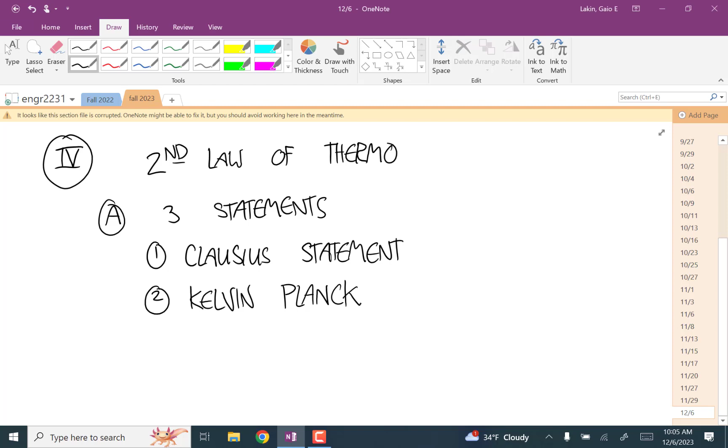And then the third one, the one that's most important for us, is the entropy statement. Remember that when we talked about the Kelvin-Planck statement, that was when we talked for the first time about efficiencies of different power cycles and ideal efficiencies that are based just on the temperatures of the boiler and the condenser.

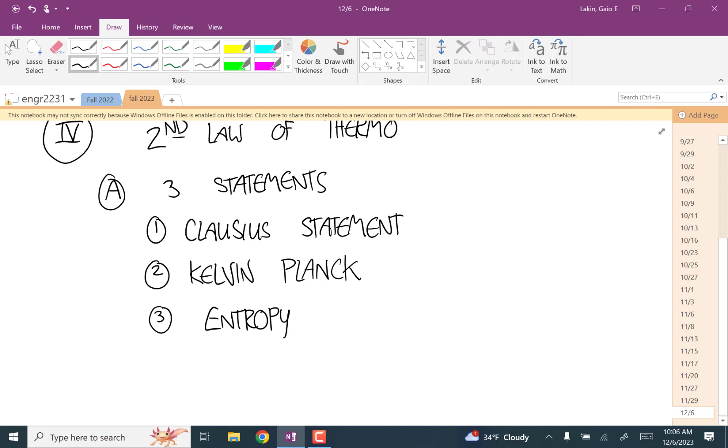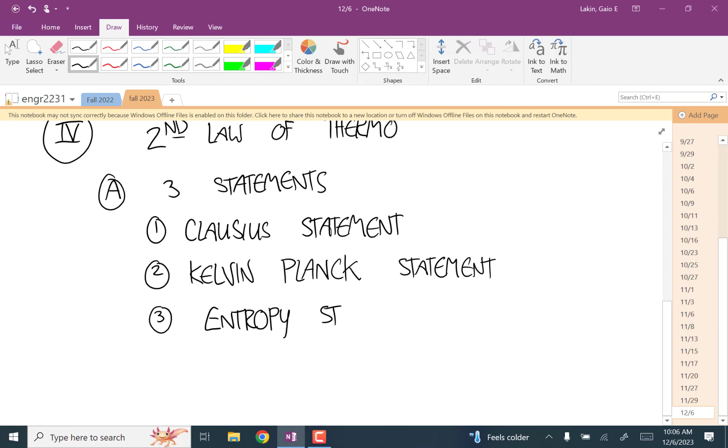And then after we talked about those, the first big result that came up was the Clausius inequality. And this was the first kind of hint at how much subtlety there is to this stuff. It's hard to keep all this straight, I know.

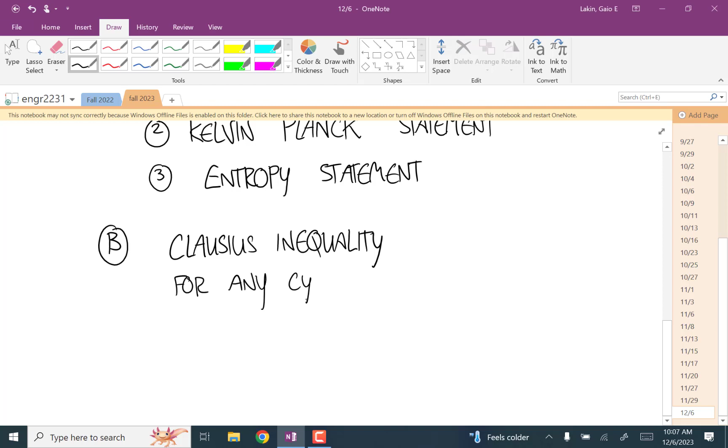But the Clausius inequality said, for any cycle, the integral of delta Q over T around the whole boundary...

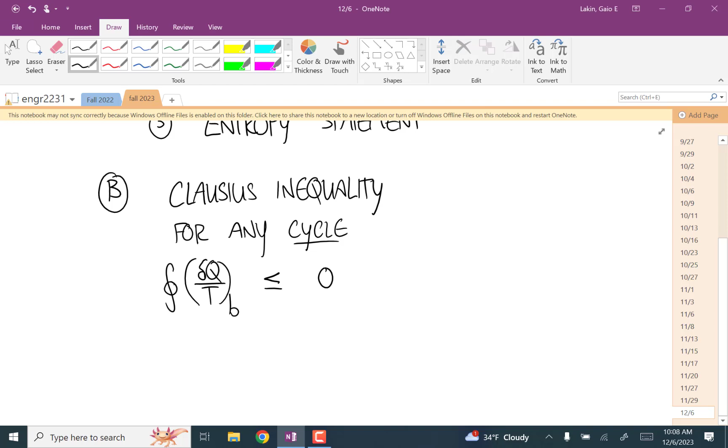You had an inequality, but I just bring it up because it's hard for me to keep this stuff straight too. But making sense out of this makes the stuff that comes later clear, so it's worth taking the time to try to straighten this out in your head, I think.

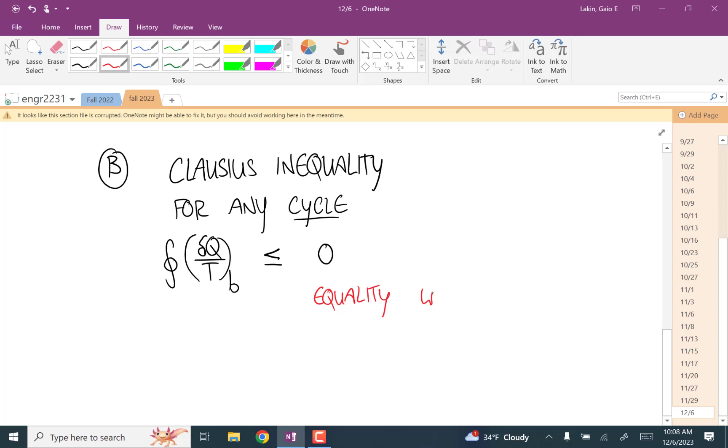And then, what would it mean if this was not an inequality? It was an equality? When would it be equal to 0? It's always reversible. Yeah, internally reversible, yep. Right idea.

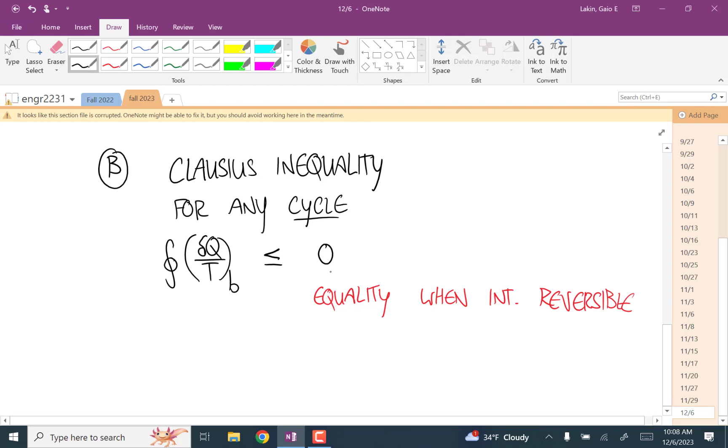Okay, and the thing to remember about this is that this is for an actual process, okay? I guess what I wrote in red makes that clear. We're not talking about a perfect thing, we're talking about actual processes. If it is a perfect thing, then it's equal to 0.

Well, that equality kind of hints at the fact that entropy is going to be a property, because if you have a cycle, then any property ends up back where it started again. So what this says is, if you start at some point, cycle all the way back to it, this thing that we're going to call entropy later is going to have no change.

Wait, didn't it say greater than or equal to 0? I swear I've seen it the other way around. The greater than or equal to 0 is if you add up all the change in entropy. Oh, I see, yeah, that's the kind of stuff that's so confusing about this. But if you take all the changes in entropy for an isolated system, you have to have greater than or equal to 0 entropy. But this is the opposite. And so what this gives us, we're going to get to it in a second.

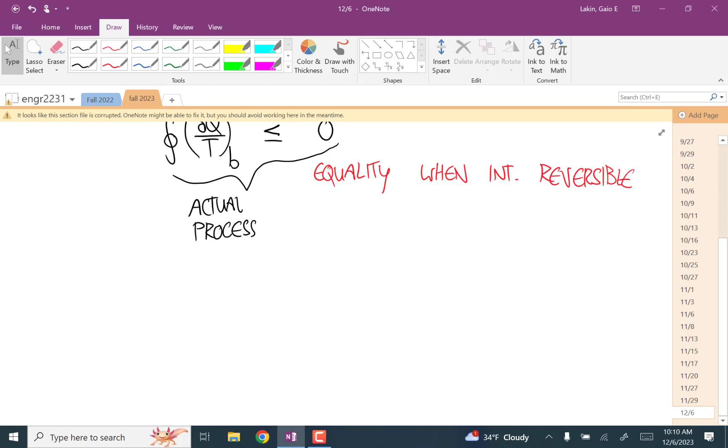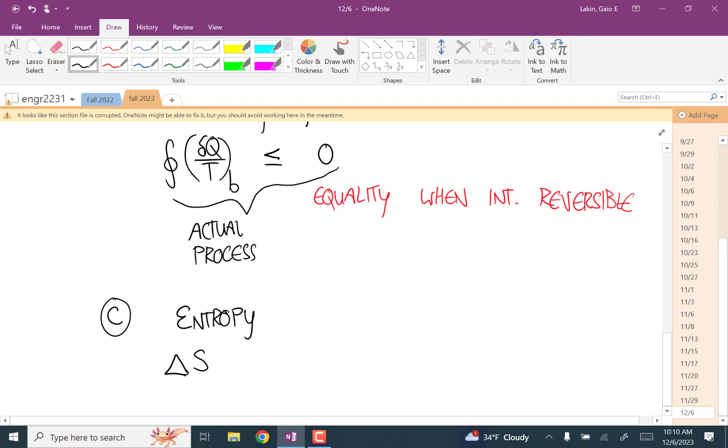Okay, so C. The definition of entropy comes from the fact that the change in entropy is equal to the integral of that same sort of funny ratio for an internally reversible system.

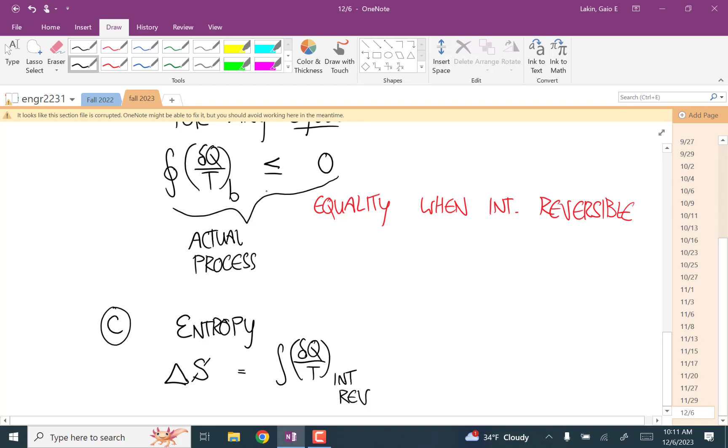Well, what would the change in entropy be for a cycle? That's what I was just saying, since it's a property, a full cycle brings you back to the same state you were at before, so there'd be no change in entropy for a cycle. On the other hand, for an actual cycle, if you're doing this calculation, you're going to get something less than 0. Okay, so now combine those two things.

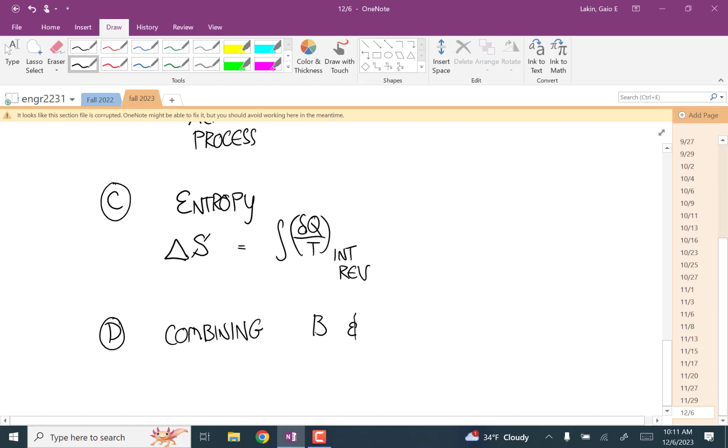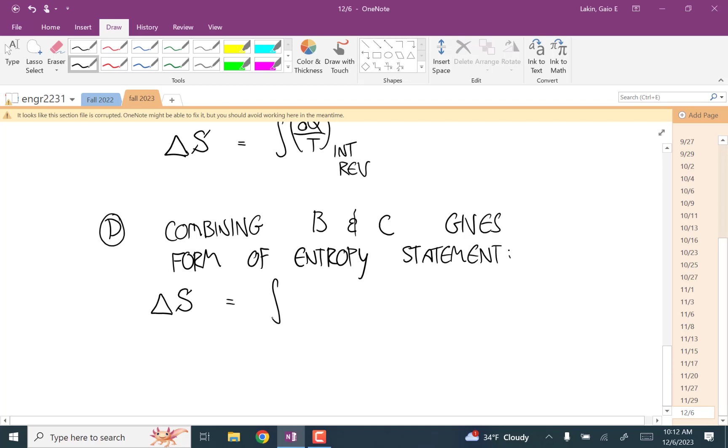Yes, sigma, but yes, exactly. Combining B and C gives this form of the entropy statement, this form that was really useful to us. And that says that the change in entropy is equal to the integral of dq over t around the boundary plus some sigma. And this has to be positive or 0.

And this is for the actual process. Well, if this wasn't for an actual process, if this was for an internally reversible process, then you have the definition of the change in entropy. So obviously those two sides would cancel each other and sigma would be equal to 0.

Okay? So online, sometimes people define entropy as like the measure of disorder of the system. Would that be accurate if there isn't any heat transfer involved at all in any kind of activity?

Remember, we talked about isentropic stuff where the entropy doesn't change, and that does require that there's no heat transfer. I mean, if there's no thermal activity at all, then you're at absolute 0 temperature, and then you're at 0 entropy.

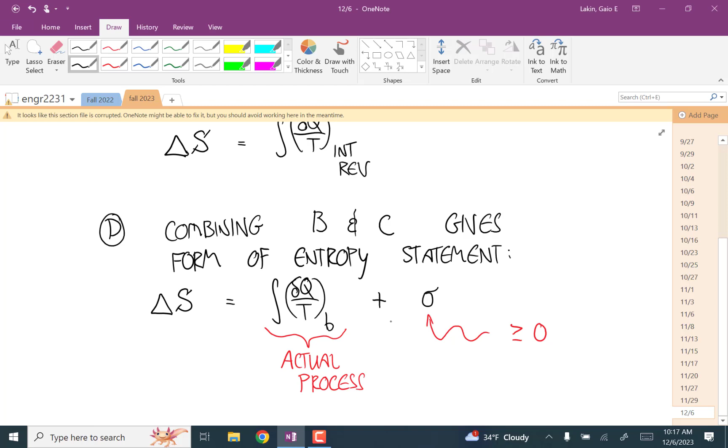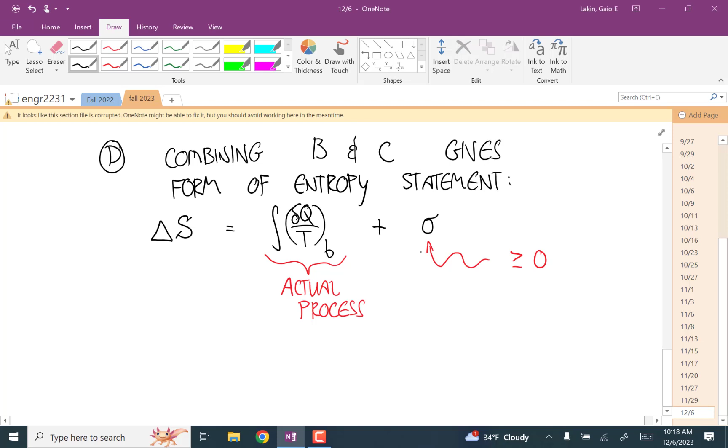So this thing is a statement of the second law of thermodynamics, one that's useful. It's useful because if you can figure out what that produced entropy is, it can tell you something about your efficiency. You want that to be small if you're building something that's efficient.

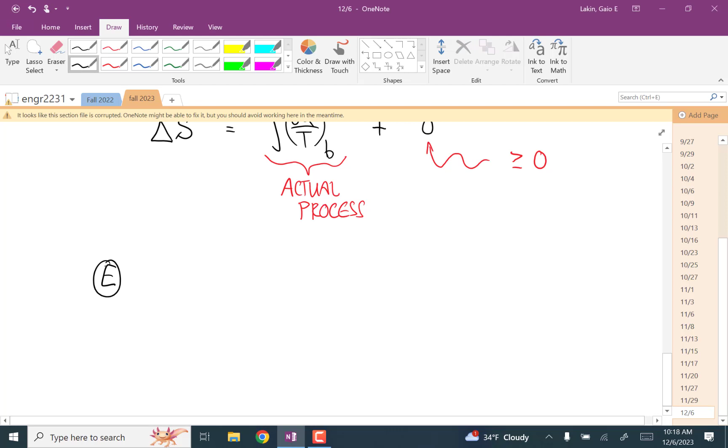And we'll get back to other forms of this sort of thing. Next was the TDS equations. These are very useful for calculations. We always dealt with them in pretty simplified cases, but a lot of the values in tables come from using the TDS equations. The key thing about this is that they always hold, so remember they're always available.

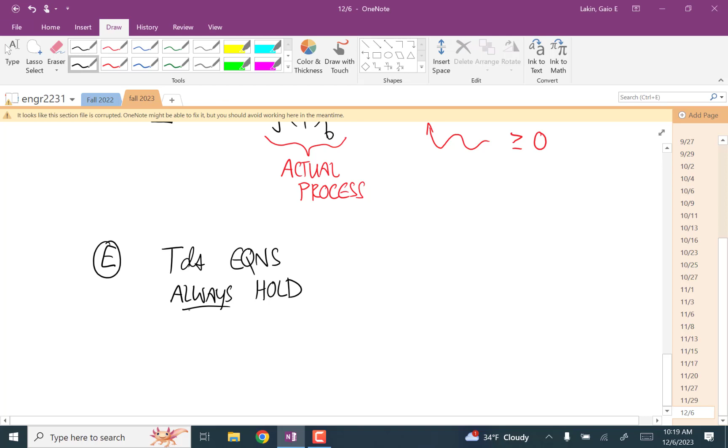And there are two of them. TDS is equal to dU plus PdV. And TDS is equal to dH minus VdP.

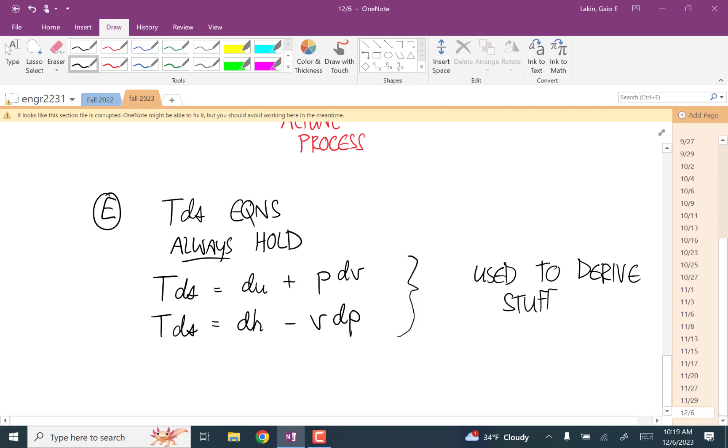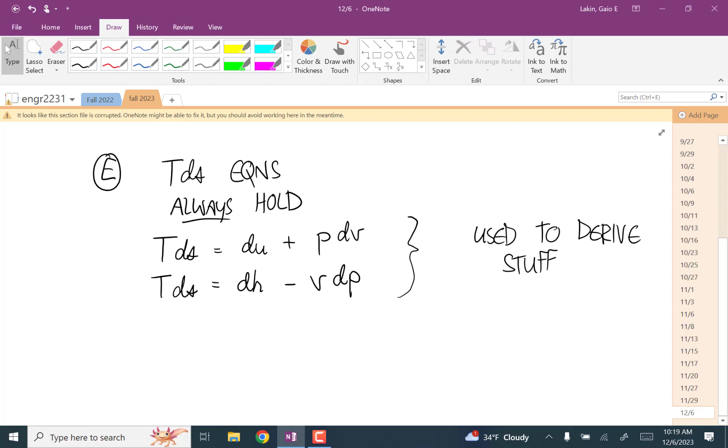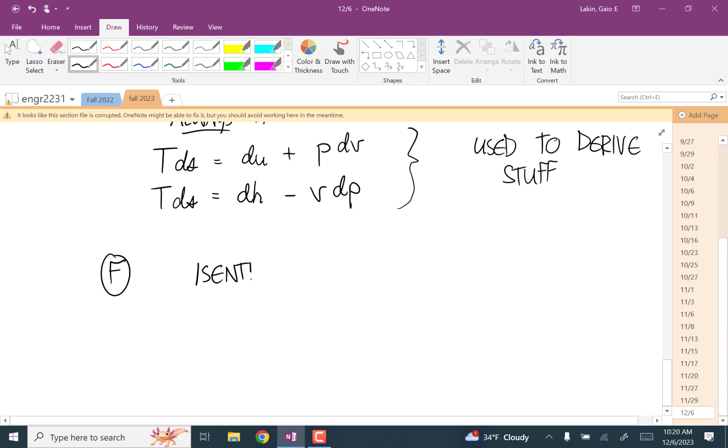And for us, we derived a lot of useful things from these. One of the things we derived, part F, was expressions for the change in entropy for incompressible materials and ideal gases. And from our expression for the change in entropy for ideal gases, we came up with this idea of isentropic processes for ideal gases. So this thing I'm about to write down comes from those TDS equations. This is isentropic processes for ideal gases.

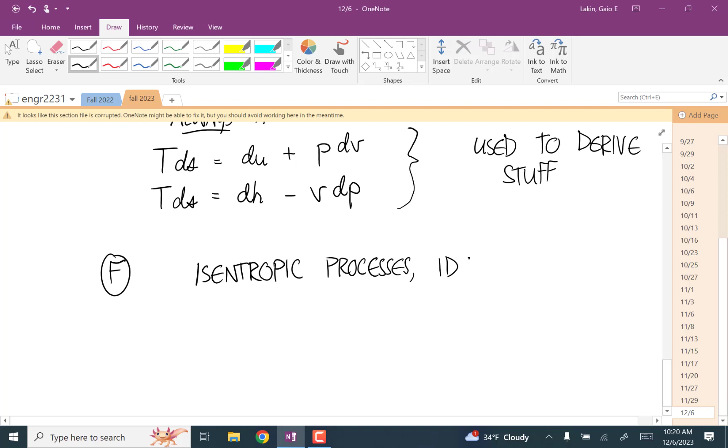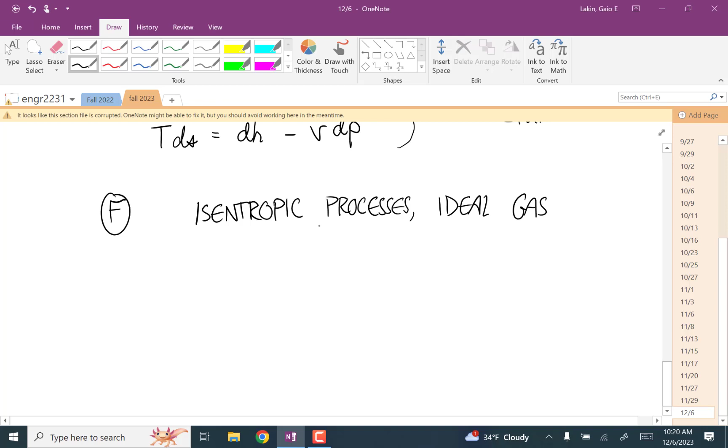What it requires for an isentropic process is that there's no heat transfer, and that the process is internally reversible. There's no irreversibilities inside the system.

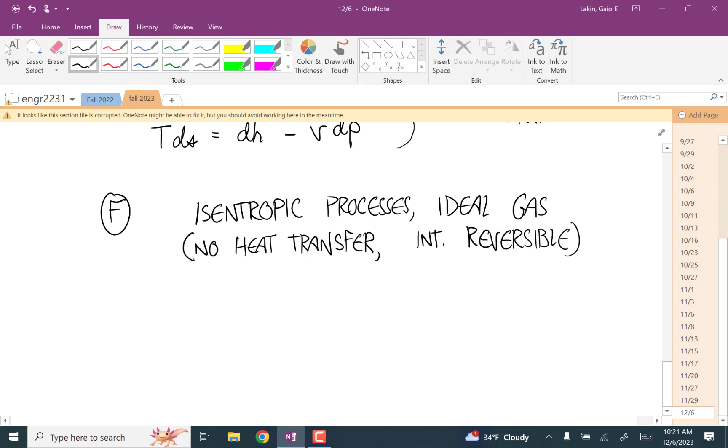And we saw this two different ways. The first way, the easiest one to use if you can, is if there's not too huge of changes in temperature. You get 0 equals Cp times the natural log of T2 over T1, minus R times the natural log of P2 over P1. So you can use knowledge of two pressures to get a beginning or ending temperature, or knowledge of two temperatures to get a beginning or ending pressure.

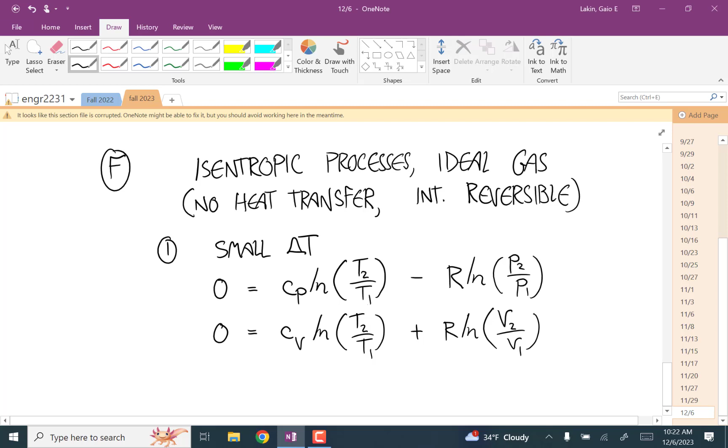And then there's another form that just comes from the other TDS equation: 0 equals Cv times the natural log of T2 over T1, plus R times the natural log of V2 over V1. If the changes in temperature are too big for this to be accurate, you can also use values in an ideal gas table.

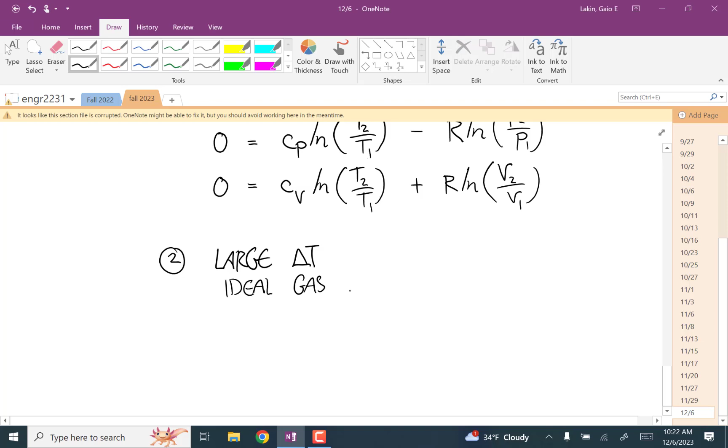So P2 over P1 is equal to P sub R at temperature T2 divided by P sub R at temperature T1. Those PRs are values you can just look up in the table.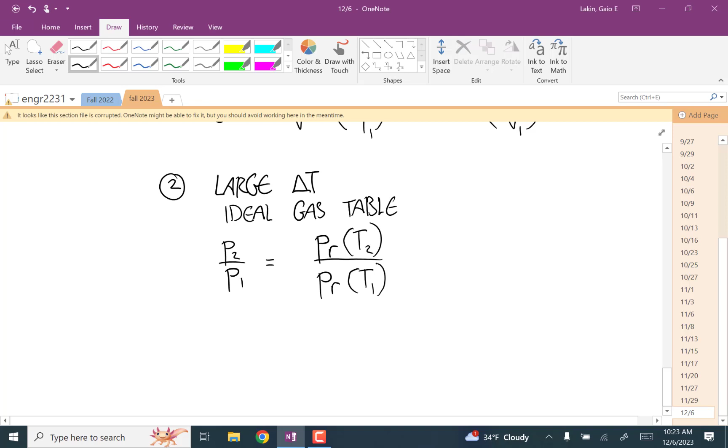And you can also come up with a ratio of the volumes with a similar idea. V2 over V1 is equal to VR of T2 over VR of T1. The PRs and VRs are just things you can look up in the ideal gas table.

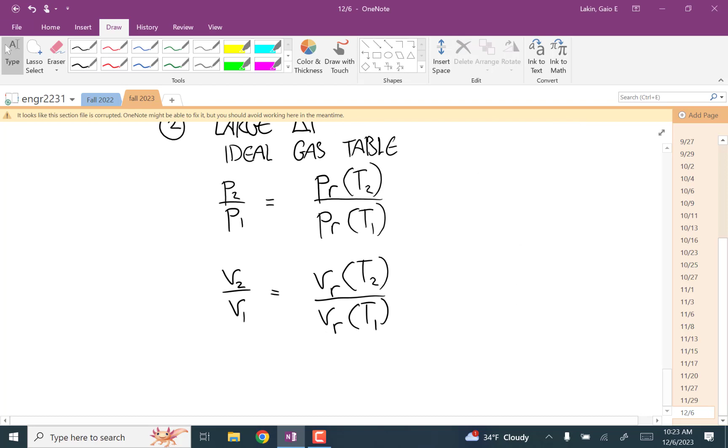And then the last thing that we talked about for the second law was, this is the second law for control volumes. And that said ds dt for the control volume is equal to the sum of all the Q dots over temperature around the boundary.

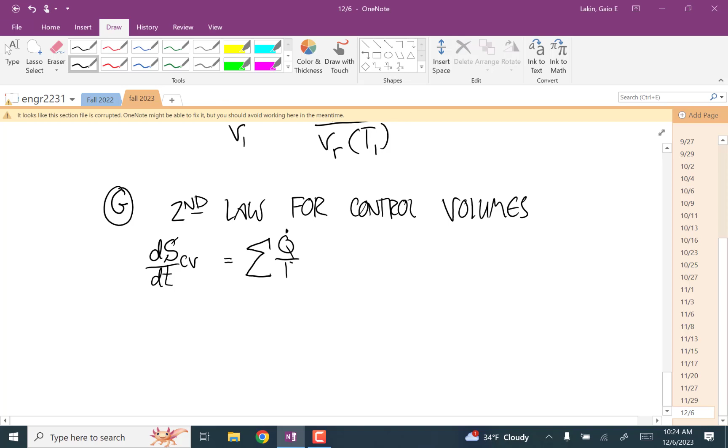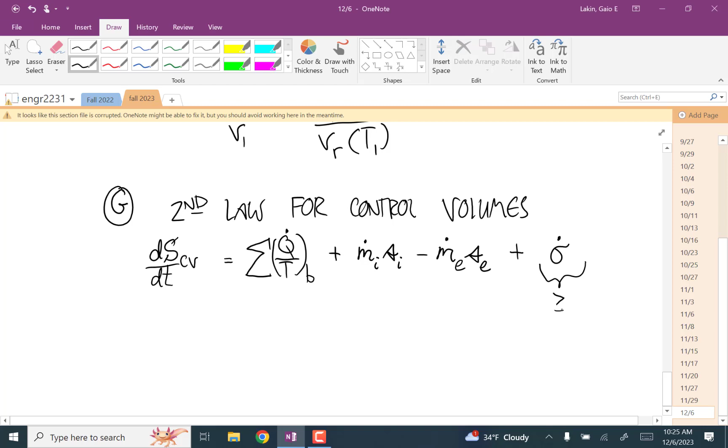Everything here is a rate. Plus m dot at the inlet times specific entropy at the inlet, minus m dot at the exit times specific entropy at the exit, plus sigma dot, and that sigma dot has to be greater than or equal to 0, and that's the rate of entropy produced.

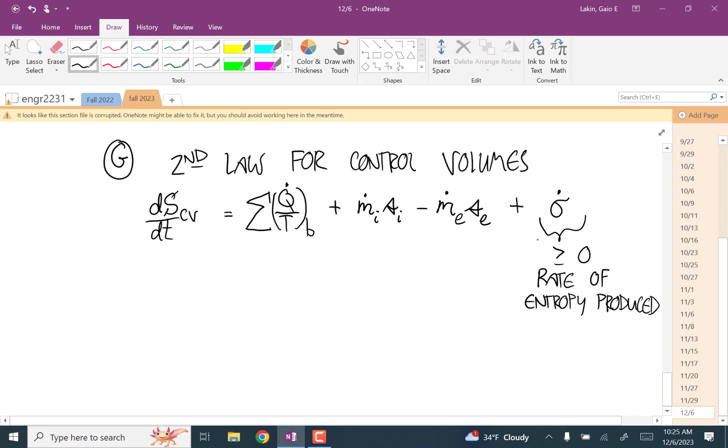And that value for the rate of entropy produced is useful the same way as our entropy produced was in the closed form, this sigma here, for just helping you find where inefficiencies are. If you have a very inefficient system, that value is going to be large, but it always has to be positive.

Can you remember any problems? We did 1 or 2 problems using this. Do you remember what kind of stuff you can do with this?

I remember one of the things that we did with it was we used the control volume first law to figure out something about a device that I said was either a nozzle or a diffuser. And we calculated using the first law what the values are, say the output speed or something like that, the exit speed. And then we ran it through this to figure out, okay, which one is it, a nozzle or a diffuser?

Remember that the second law is always something you can use, it's the only tool we have to figure out the direction in time that a process is moving. So what we did then is we assumed it was a diffuser, say, ran it through this. If you get a positive value of sigma dot, then okay, it's a diffuser. If you get a negative value of sigma dot, then no, it has to be a nozzle because it can't go in that direction in time.

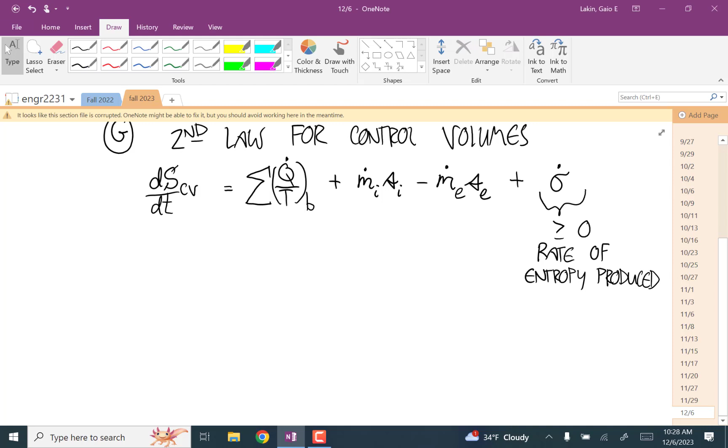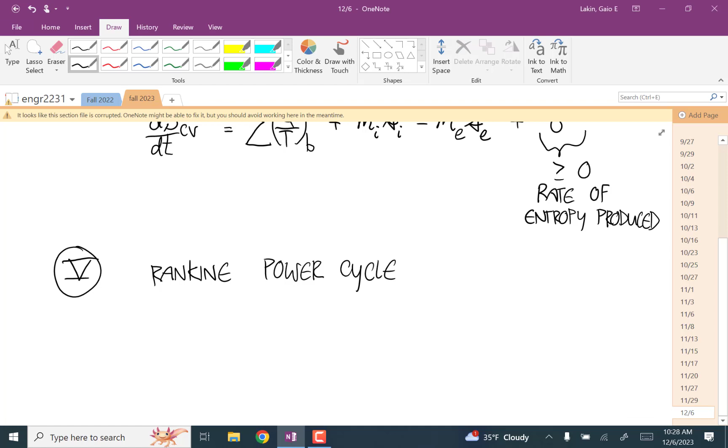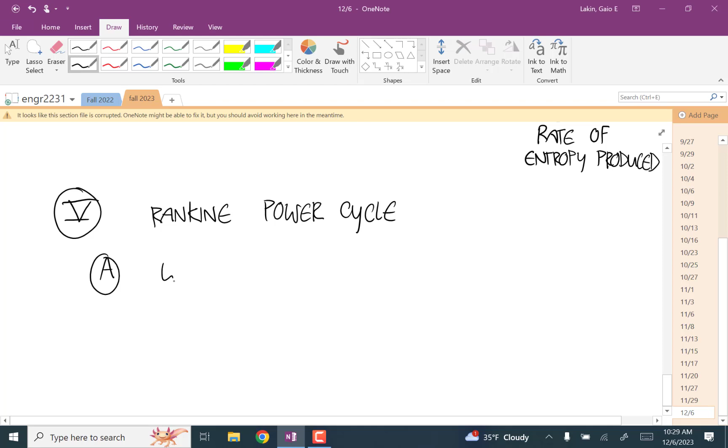Okay, and then the last thing we talked about was Rankine power cycles. So first I'm going to talk about without reheating. So this includes the case with superheating and the case without superheating. Both of them work like this.

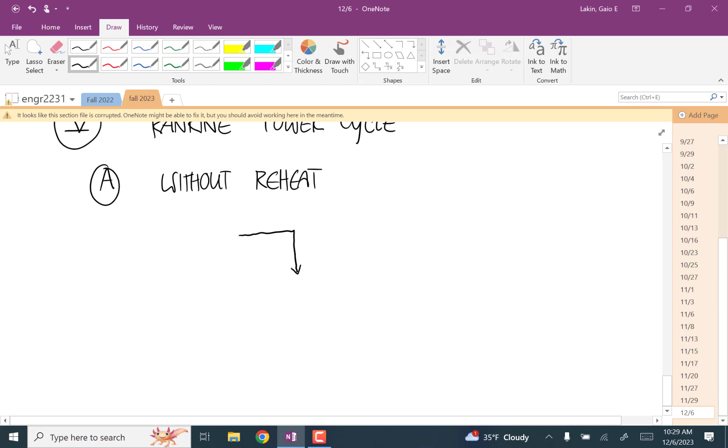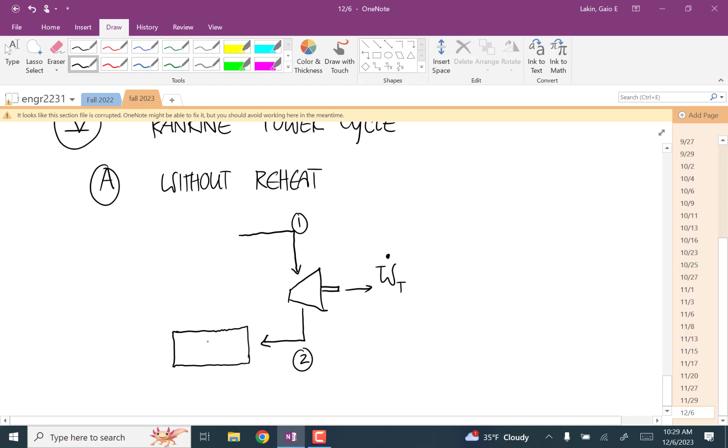You start here at state 1, go through a turbine to extract power, and that power is W dot coming out of the turbine. Then you get to state 2 and go through a condenser. And at the condenser, heat at a rate of QC dot leaves the system.

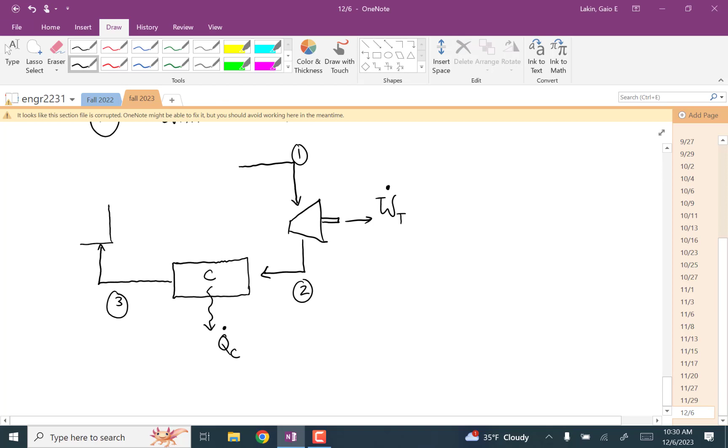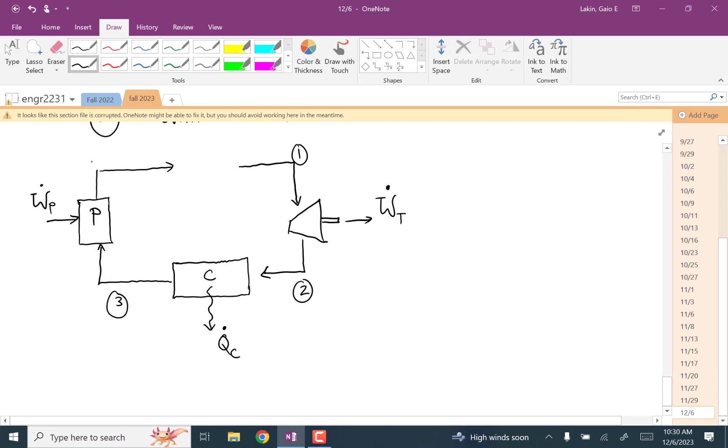Then you get to state 3, and the working fluid goes into a pump. And at the pump, work is done on the system, WP dot. And then coming out of the pump, you're at state 4, and you get to the boiler or the steam generator. And at the boiler, heat comes into the system at a rate of QB dot.

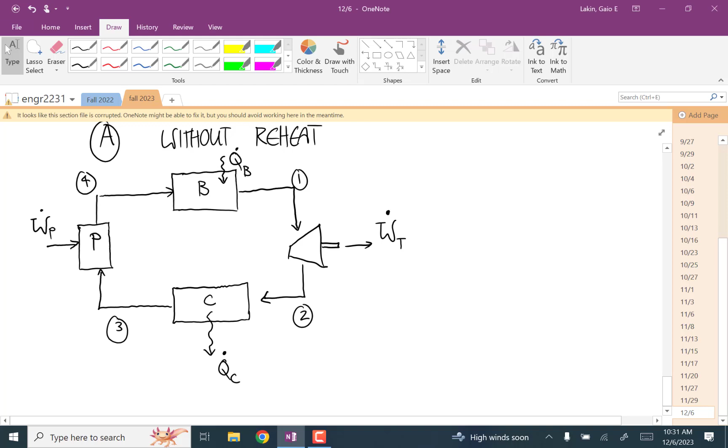And this can look 2 ways on a temperature entropy diagram. If you have no superheating, state 1 is here, state 2 is there, state 3 is a saturated liquid, state 4 is the one that's kind of a pain because it's the only one in this cycle that isn't a saturated state.

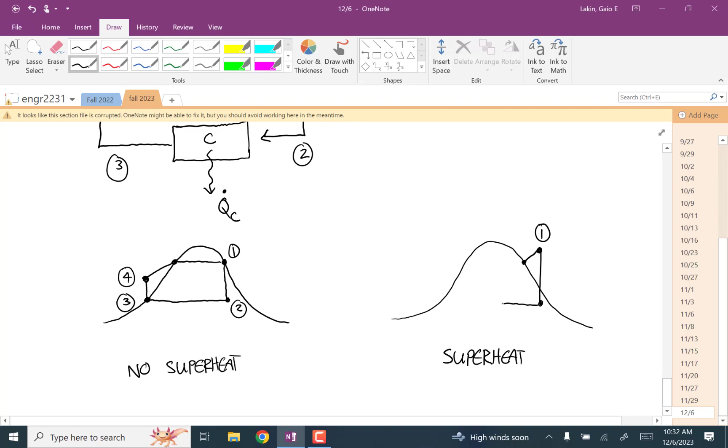And if you have superheating, everything looks the same except that this point here is not state 1, this is state 1. Two, state 3, state 4.

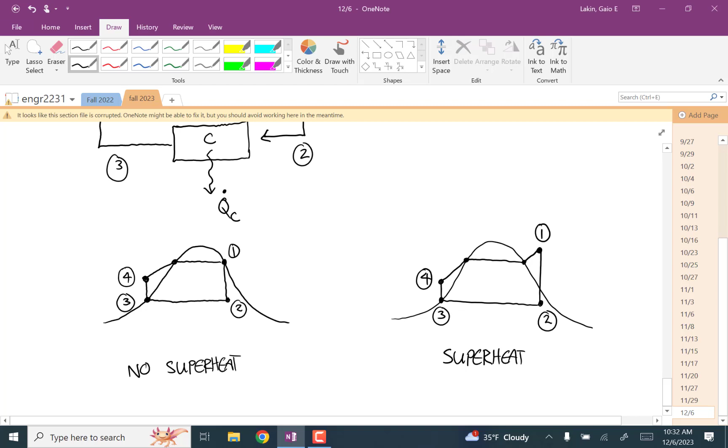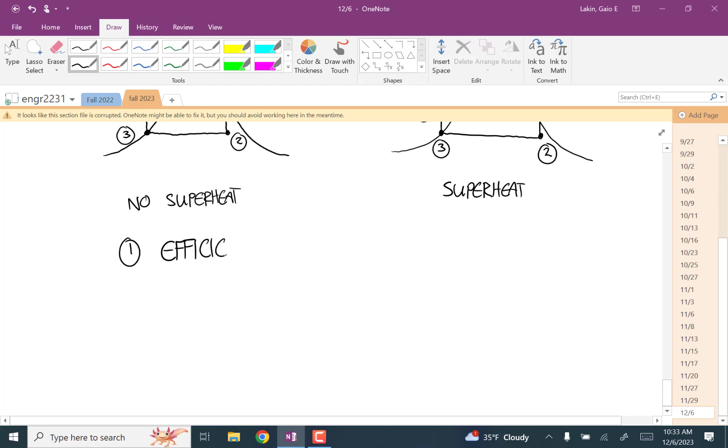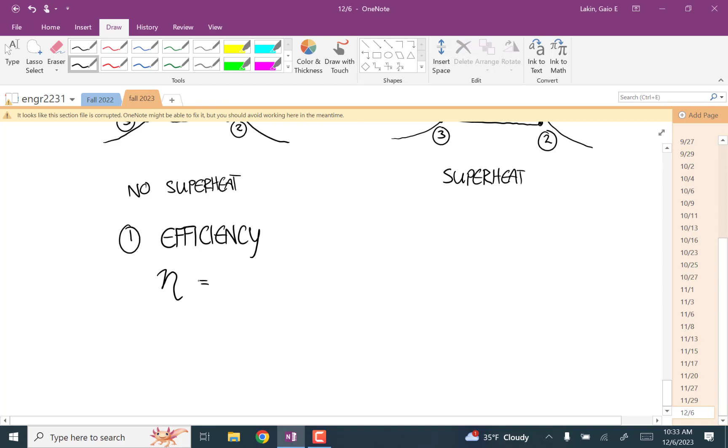In order to calculate the efficiencies in both of these 2 cases, the efficiency is equal to 1 minus H2 minus H3 over H1 minus H4.

And this efficiency goes up as the temperature or the pressure at the boiler go up. Can you understand my notation there? That's kind of ugly, but this efficiency improves as the temperature or pressure in the boiler get higher. And it also, this efficiency goes up as the temperature and pressure in the condenser go down.

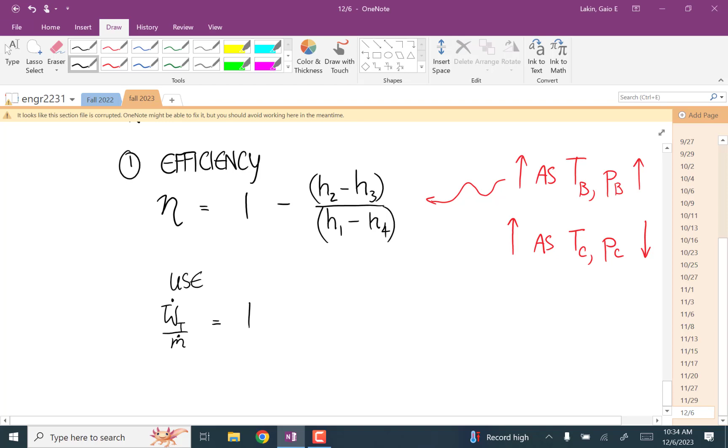And in order to calculate this efficiency, we'll use these 4 facts. So WT dot over M dot is equal to H1 minus H2.

QC dot over M dot is equal to H2 minus H3. Anyone remember where we got these? Where we derived these, like WT dot over M dot is equal to H1 minus H2? We got those from the control volume first law.

Then the pump. WP dot over M dot is H4 minus H3. And remember that the pump is the one that's kind of a pain because you have a compressed liquid the whole time. But this is the one where most of the time we're going to use the fact that this is incompressible. So this is also equal to the specific volume times the pressure at state 4 minus the pressure at state 3. So you can use either of those two.

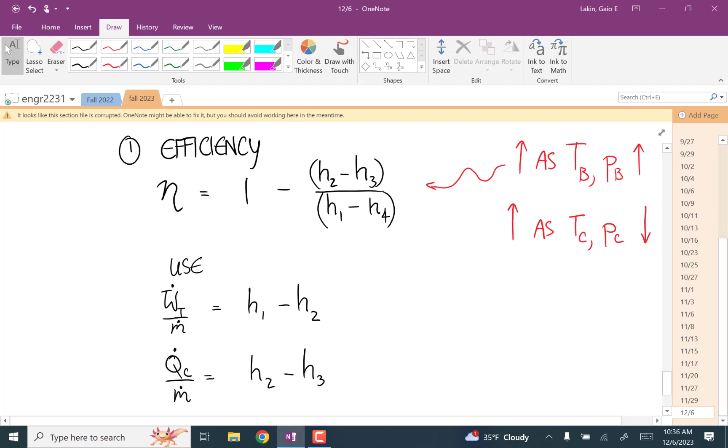And then Q dot at the boiler over M dot is H1 minus H4. These things you'll, yeah, everything here will be given. I just want you to notice here that whether there's superheating or not, all of this stuff is the same. The only thing that's different if there's superheating is you need one more property to know what's going on at state 1, because you're not at a saturated state.

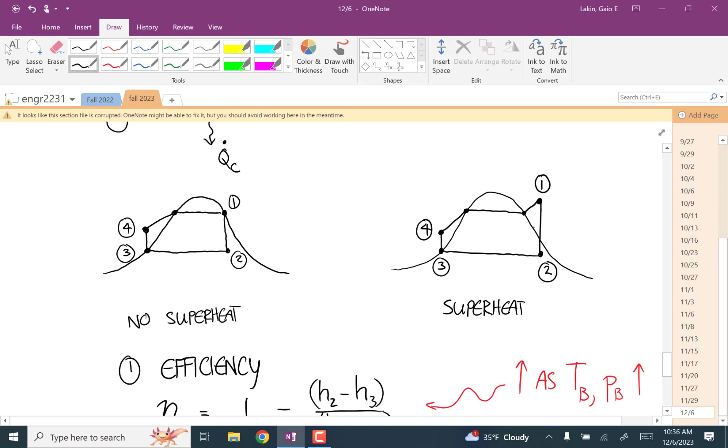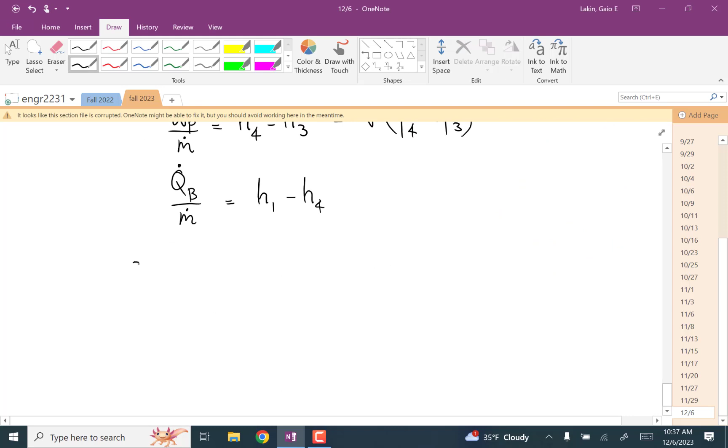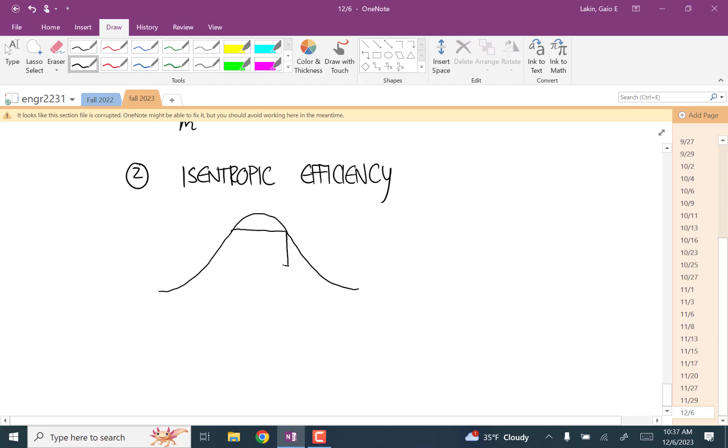And then we talked about second, isentropic efficiency. So we're still talking about these two cases where there's no reheating. This is the case where we take our, I'm just drawing this in the case of no superheating, but it works the same if there is superheating.

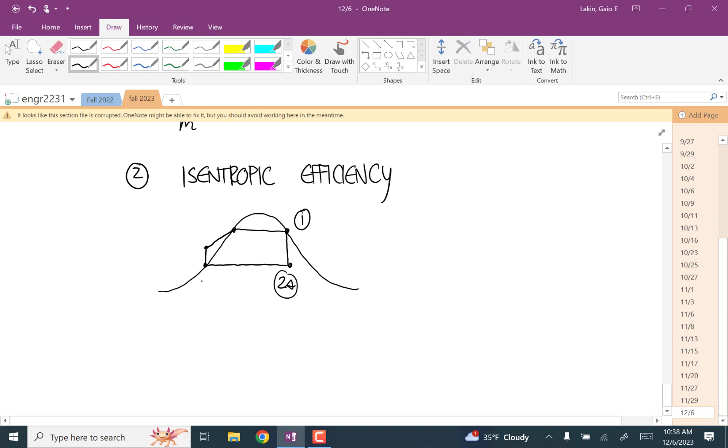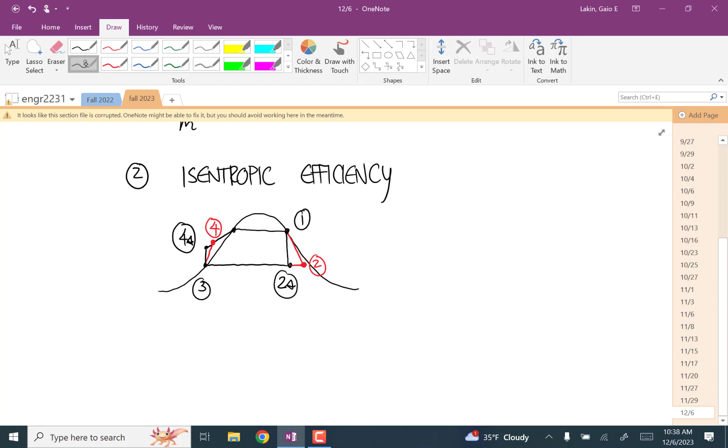But we first do this calculation for this ideal case where we have a state 1, a state 2S. So that's assuming isentropic turbine. State 3, state 4S. And then we piggyback on those results to get the true state 2 and the true state 4. And doing that is really easy.

We just use these two equations that say H2 is equal to the isentropic efficiency for the turbine times the quantity H2S minus H1, plus H1. And then for state 4, H4 is equal to 1 over the isentropic efficiency for the pump times the quantity H4S minus H3, plus H3. So you go through problems like this exactly the same as if they are ideal, and then you just make these corrections at the end.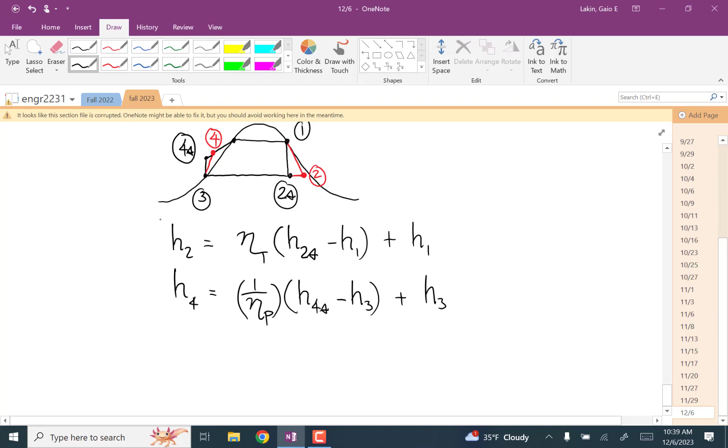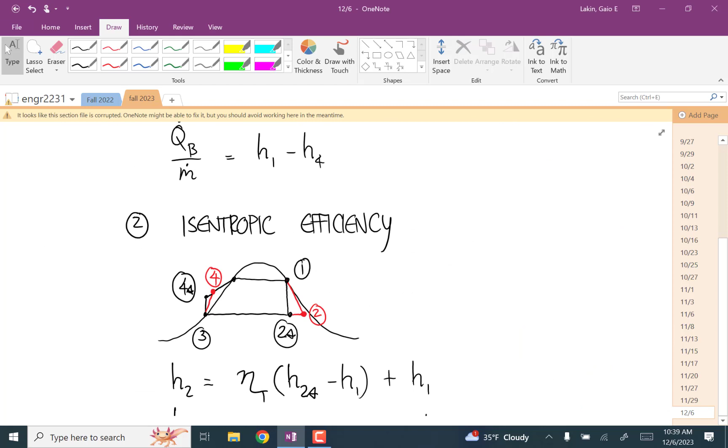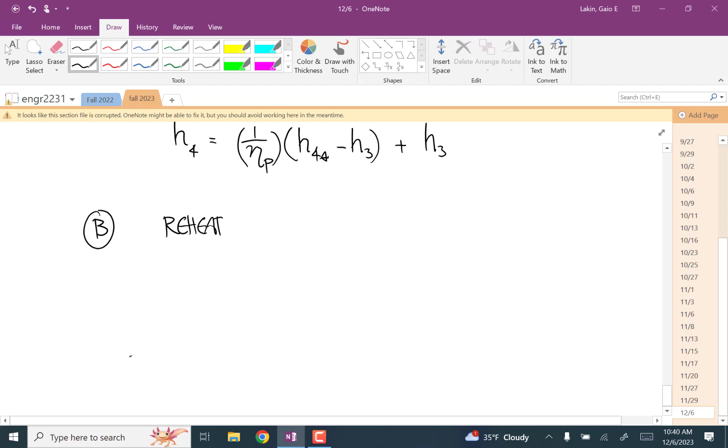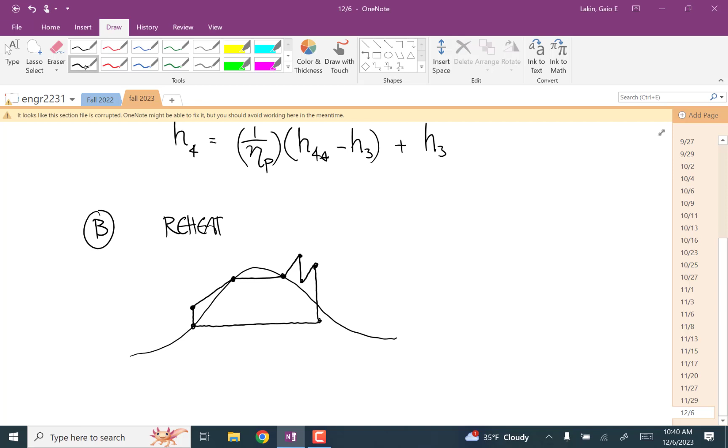Okay, so this is all if you don't have reheat. And the last thing we did was, well, what if you do have reheating? And this time, we have a state 1A here, a state 2A down here, 1B here, 2B here, and then 3 and 4, just like they were before.

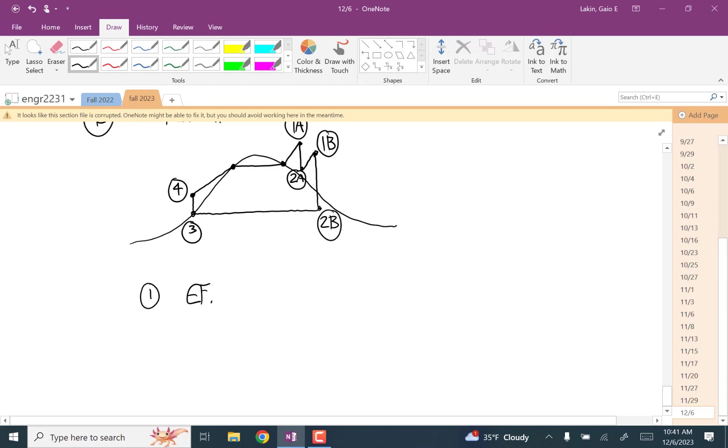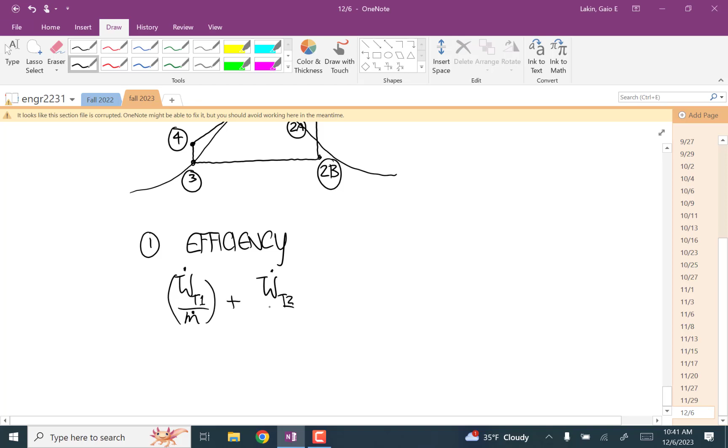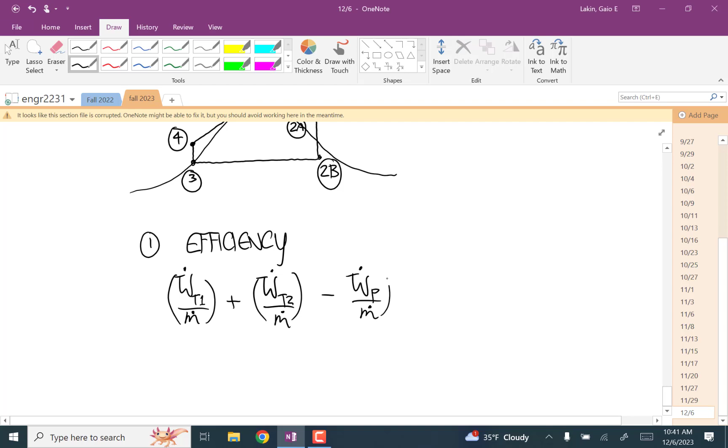And the calculation of the efficiency is a lot uglier now. So we have W T1 dot over M dot plus W dot T2 over M dot minus WP dot over M dot, all over Q boiler 1 dot over M dot plus Q boiler 2 dot over M dot.

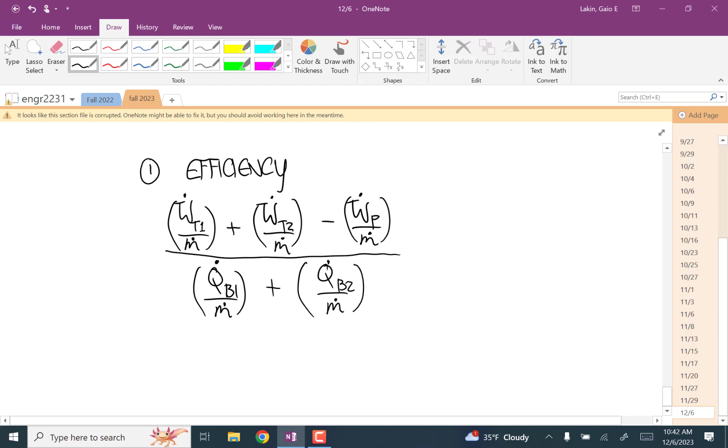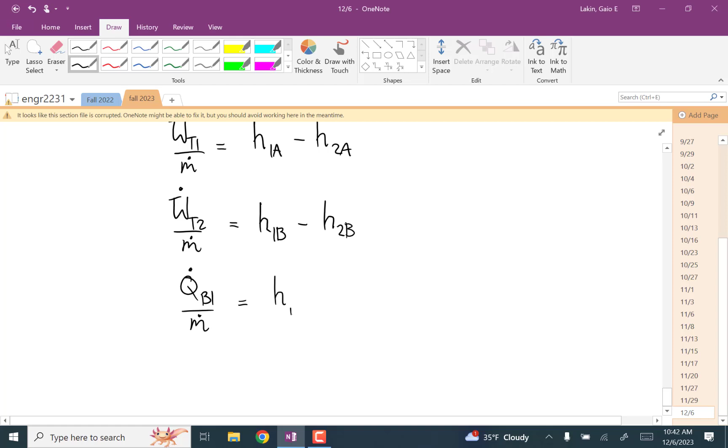And those come from: W T1 dot over M dot is equal to H at state 1A minus H at state 2A. WT2 dot over M dot is equal to H1B minus H2B. QB1 dot over M dot is equal to H1A minus H4. And QB2 dot over M dot is equal to H1B minus H2A.

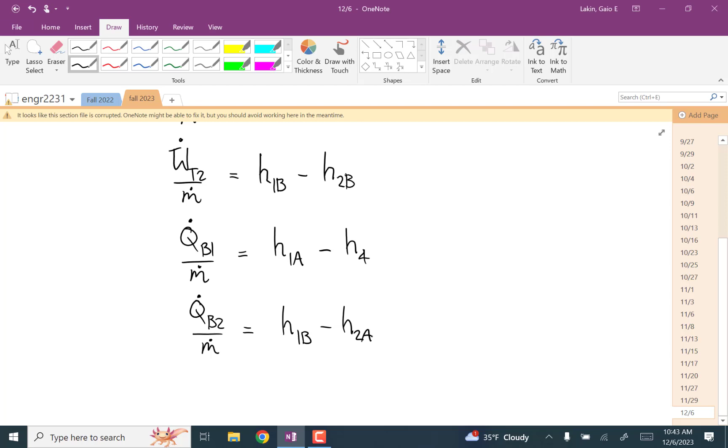Okay, and that's a class. That's all you need to know about thermodynamics for now. Anybody have any questions about, I guess first, any of these Rankine cycle things? So always in the Rankine cycle things, all you're trying to do is find those enthalpies. And then any other just sort of general questions about things?